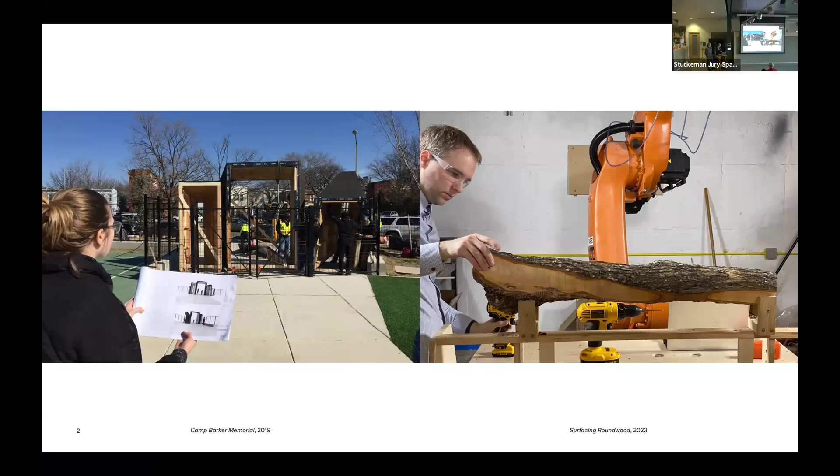Our work is developed through two venues, After Architecture and the Before Building Laboratory. Both venues foreground material investigations from conventional construction to maturing digital tools. After Architecture is our architecture practice, named to convey the built environment's impact on cultures and ecologies. We implement ideas and systems developed in the lab on real-world projects, including temporary installations as well as permanent buildings and public art. Our work is characterized by a foregrounding of material and its accompanying narratives.

We started our practice through designing and building permanent works of public art, which often doubled as furniture and lighting. Early on, we also pursued design build competitions. As our work developed, we found that our firsthand experiences with construction stirred up questions around material processing, impact, and efficiency.

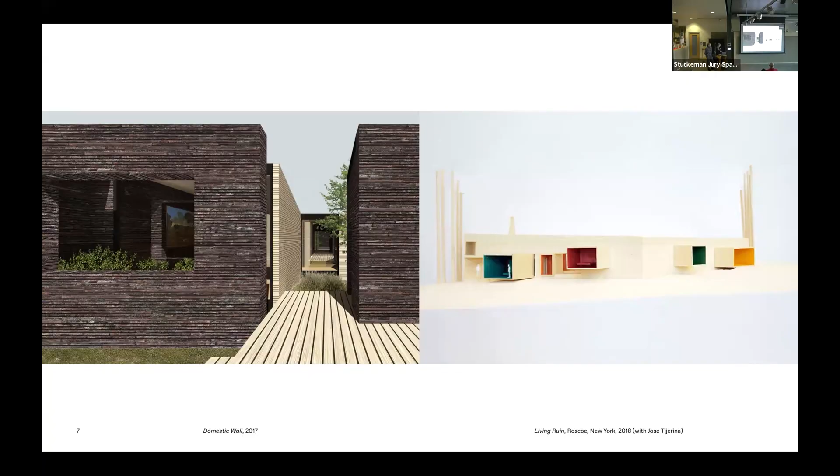Such questions are explored through design across scales, from an outdoor classroom to a theatrical landscape. These questions also inform the design of housing that leverages thermal mass and existing ruins.

More recent work seeks to collaborate with natural materials and processes, including the cultivation of barley seeds in shaped molds that produce both models and furniture. Here, the overall form is controlled by the designer, while aesthetic effects of the surface, texture, and density are co-authored with other living organisms that have their own specific behaviors and growth patterns relative to light and gravity.

As a complement to our professional practice, we co-direct an academic research laboratory at the University of Virginia. The Before Building Laboratory pioneers new material assemblies to advance circular construction practices, allowing for experimentation and the taking of risks through grant-funded projects that are often not possible in purely client-driven work.

As the climate crisis leads to indeterminate material supply chains, architects and builders must look beyond existing industrial materials for construction. There are numerous materials to be found locally that, if strategically sourced, have the possibility to improve native ecosystems.

For this goal, we collaborate with a team of student research assistants to investigate the use of native grasses, invasive plant species, and trees targeted by invasive insects. In each case, we work to understand and leverage the unique properties of these atypical natural materials.

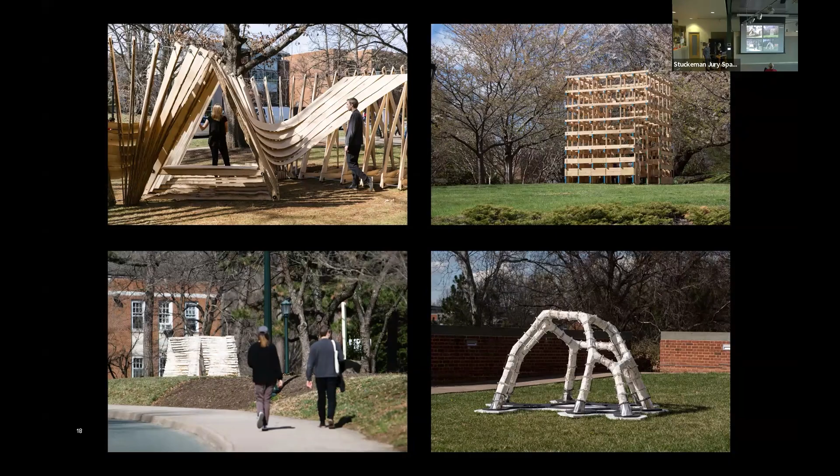So to transition and talk about logs and lumber now, our recent work focuses specifically on wood, where the work is questioning the planar assumptions of mass-produced lumber by interrogating the practices of sawmilling. How do we turn logs into lumber?

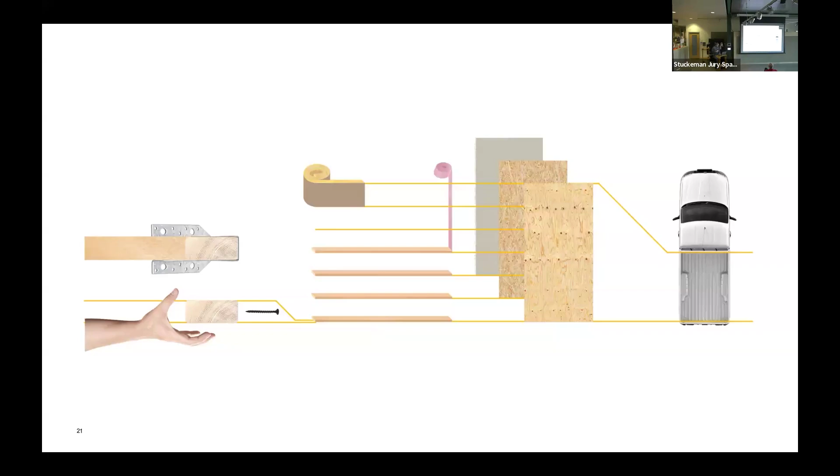Even as new movements in architecture have embraced bespoke form, prisms and sheets remain the basic unit from which geometry emerges. The tectonics of the digital turn extend and reapply effective methods to now create custom form from standardized materials.

So in projects like these, we have logs that are turned into standardized sheets, such as plywood, and subsequently then turned into bespoke customized forms through digital fabrication processes. And in each step in that process, there's energy and time and often wasted material.

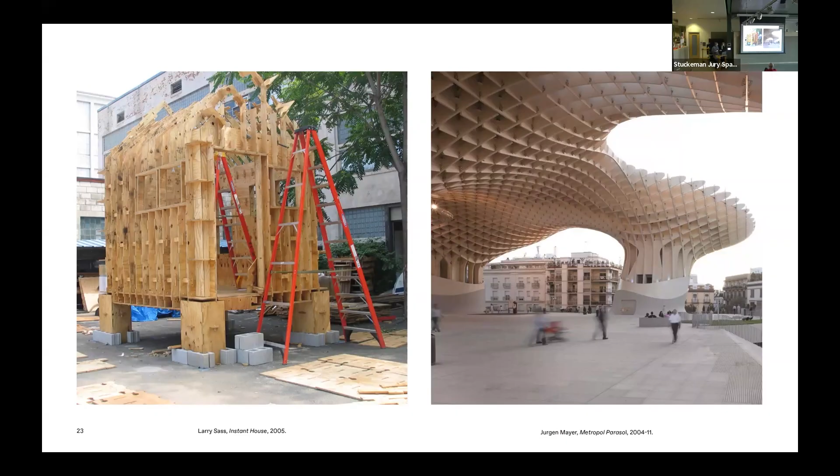So most recently, the timber turn in architecture has resulted in a series of products that thicken and multiply the familiar lumber unit and plywood sheet into meatier assemblies that promise larger buildings and more sequestered carbon.

So this is an argument made for more material rather than less, right? The more wood you can put into a structure, the more carbon you can sequester within that structure.

But these are similarly bound by the formal restrictions of dimensional lumber, and they largely are a kind of ecosystem of building products that produce straight beams and columns and flat floors and walls.

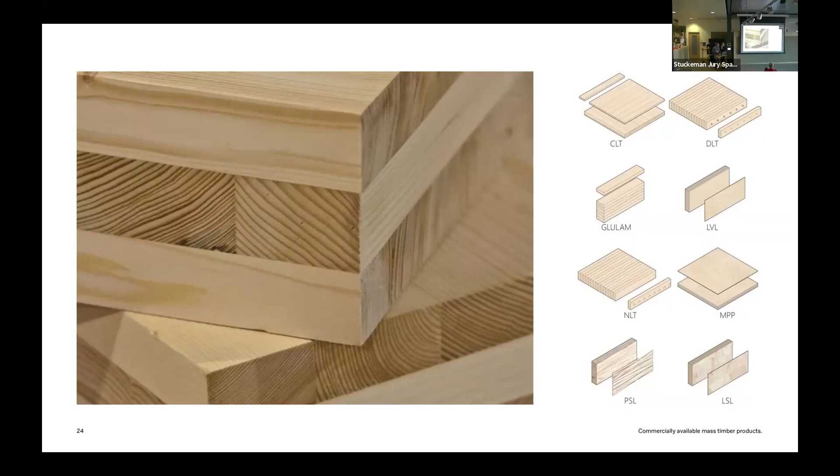To get into some projects now: Tangential Timber, which you might notice from the posters in your beautiful school here. This project pilots an application for cross sections of wood. These are called either rounds or cookies in the timber industry—we wish we thought of this name, we did not, but we love that they're called cookies. For the project, we sourced wood from a campus stockpile of trees felled by storm, disease, and infestation. This material was either too short, too curved, or otherwise irregular to be turned into conventional lumber, so we were looking for other applications for it.

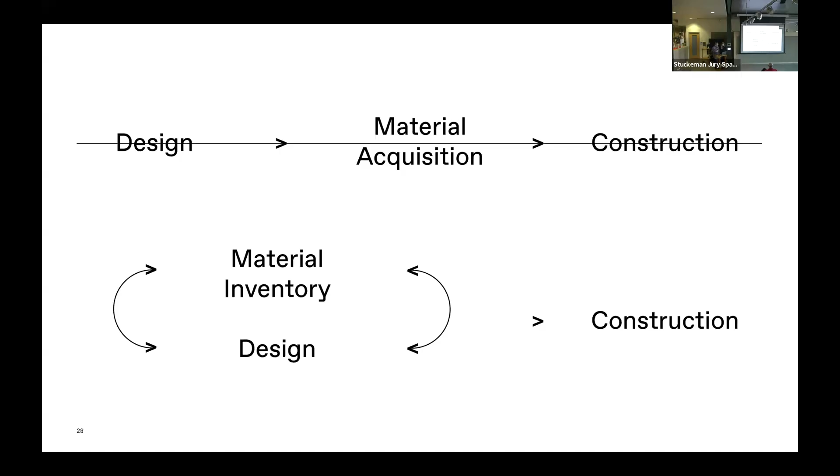If traditional project delivery involves creating design documents long before material is ever acquired, twinning instead offers the potential to leverage 3D imaging technologies to inventory material inputs, allowing the design process to progress as a dialogue with materials. There's a feedback loop formed between the specific material you're using and how the design itself takes shape.

Twinning presents one strategy for incorporating material feedback, referring to the creation of digital doppelgangers of physical artifacts through 2D and 3D imaging technologies. The technology itself is not new—it's been around for quite a while—but it's becoming increasingly accessible and available to more people.

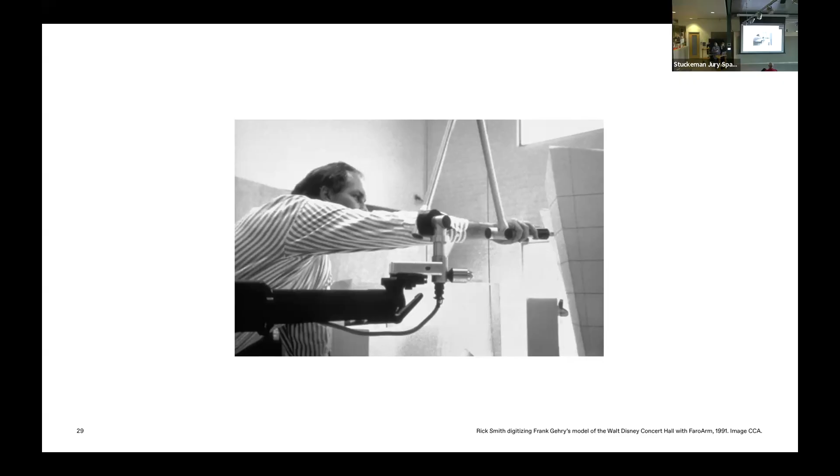Shown here is an example of early digitization practices in Frank Gehry's office. Here they're deploying a 3D pantograph in which points are located in three-dimensional space on a physical object, in this case a large-scale architectural model. Those points are then translated into the construction of a 3D digital image.

Standard 3D scanning methods of each cookie would have produced really detailed digital models that would promptly crash our computer if we were working with all of these in the same file in Rhino and Grasshopper. So instead, we developed a custom low-cost, low-data workflow to document each piece of material.

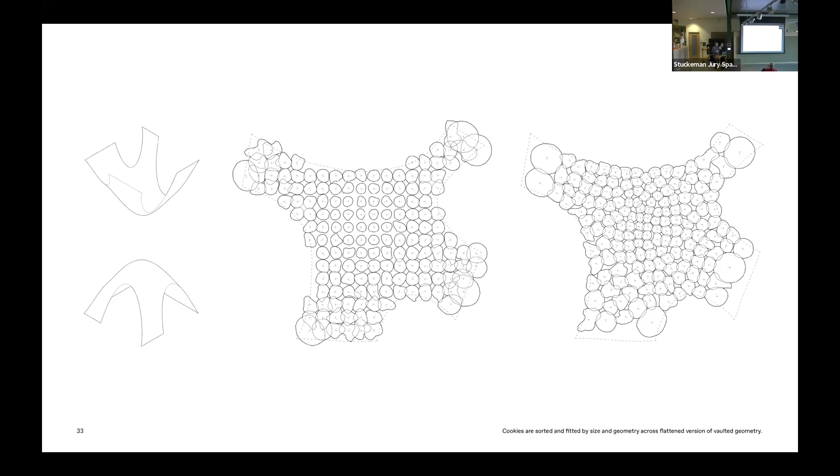We did a spring simulation to gather the cookies, and on the right you see them in their aggregated form with overlaps, the controlled distance of which is important for generating joinery between the pieces. The vault is square in plan with arched openings on each side.

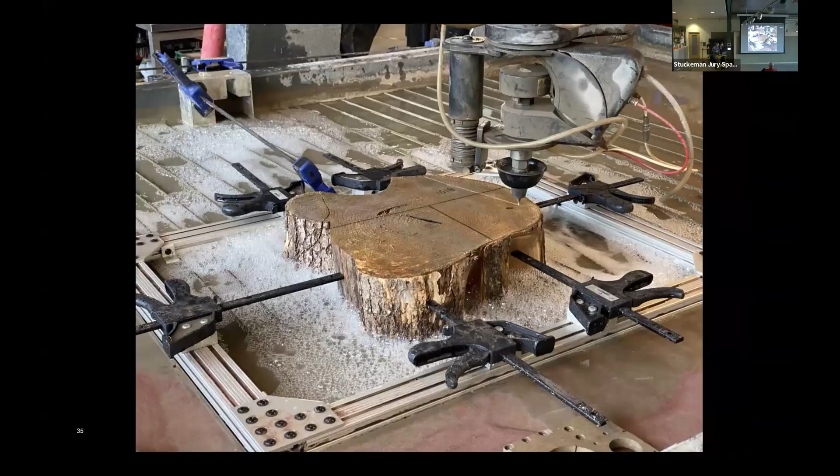To fabricate the structure, the first step was done with a 5-axis CNC water jet, used to cut the complex joinery in each cookie with a series of ruled surfaces. We had to cut all the way through the material.

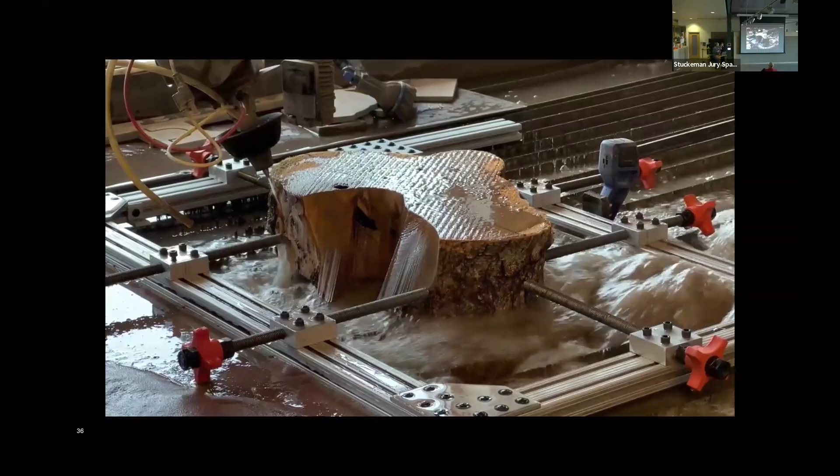There are limitations in all these tools. We view them as opportunities. In this case, we have to cut all the way through the material in a straight line, hence the ruled surfaces. This joinery was tailored to, and actually generated in part by, the profiles of each cookie itself.

Finally, timber units double as both structure and ornament. Structural stress lines are inscribed into the surface of the vault and produce a CNC milled texture.

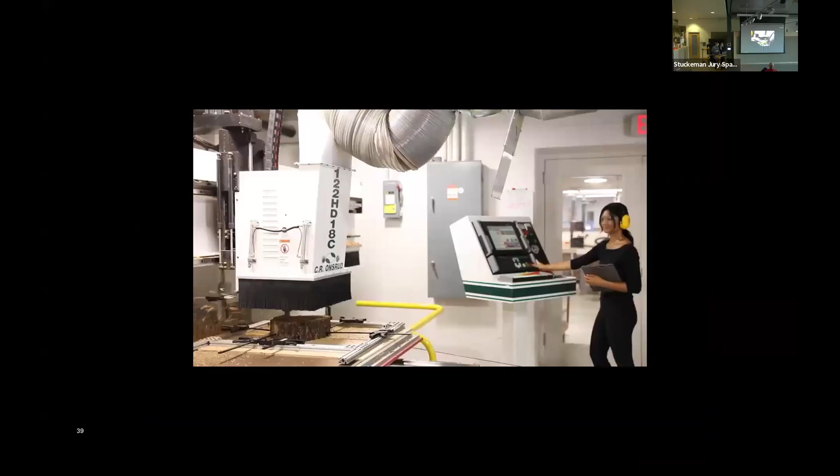This is a more traditional digital fabrication process, but with custom toolpaths generated from our scripts. These lines double as a graphic pattern for aligning the wood masonry units in this 3D puzzle, and also register as a second wood grain overlaid across the tree's growth rings.

We also use this as an opportunity to control the thickness of the shell. The depth of the cut was determined by the density of these stress lines from a structural simulation, and the shell was thicker where more forces were present and thinner where less material was needed.

Once fabricated, the pieces are relatively easily assembled by one or two people with minimal scaffolding, and the structure quickly becomes self-supporting.

Those lines are really helpful to actually assemble this thing. You have this 3D puzzle you're trying to figure out, and those lines, those graphics on the surface, became a kind of visual aid in that process.

The interior of the structure takes on an entirely different texture than the exterior. The vaulted design is a small-scale investigation that suggests how customization technologies can enable designers and builders to work more closely with and responsively to irregular natural materials across scales.

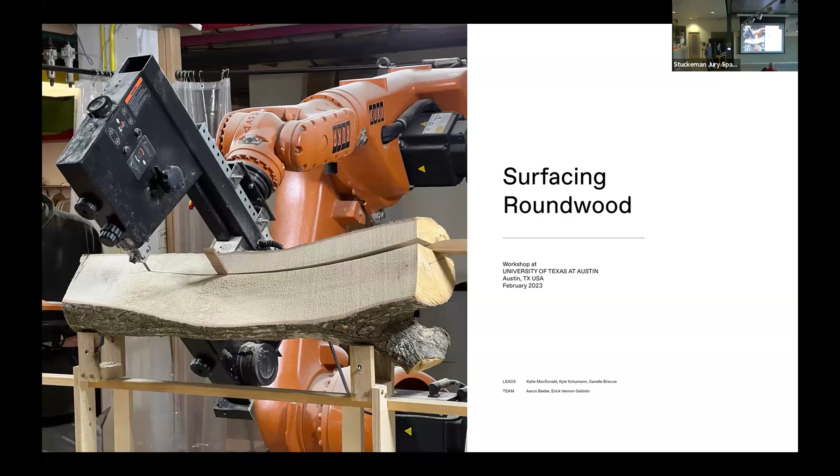In the next series of projects, we're looking at, again, how to respond to the specific geometry of material. Surfacing Roundwood was a workshop we led at the University of Texas at Austin, which explores possibilities for roundwood timber through low data 3D scanning methods and the robotic sawing of roundwood logs.

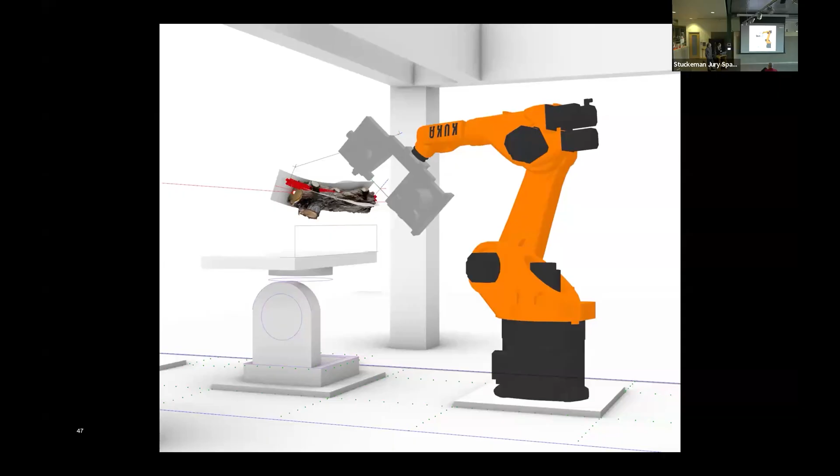The workshop builds on other researchers' work mounting custom bandsaws to robotic arms as end effectors. Rather than build a bandsaw from scratch, we mounted a small off-the-shelf woodworking bandsaw on a robotic arm, then using the 3D scans, generated tool paths relative to the curvature of each log specimen.

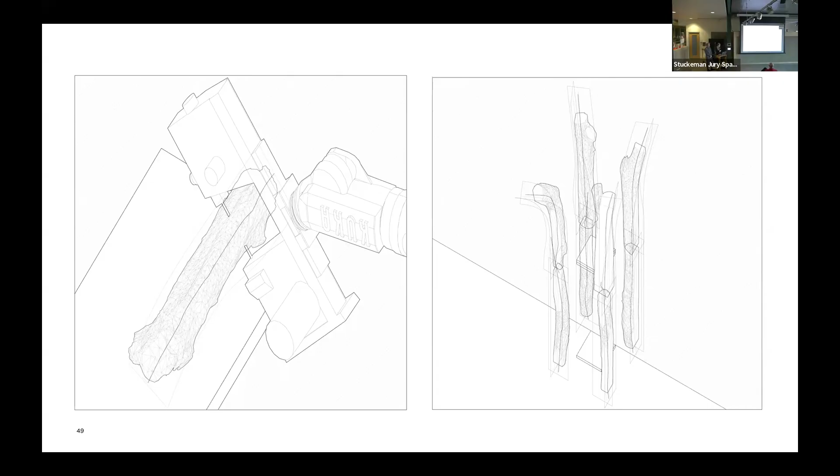These cut logs were assembled into a columnar assembly with a straight conventional base and a capital that embraced the deformation of each log's center line.

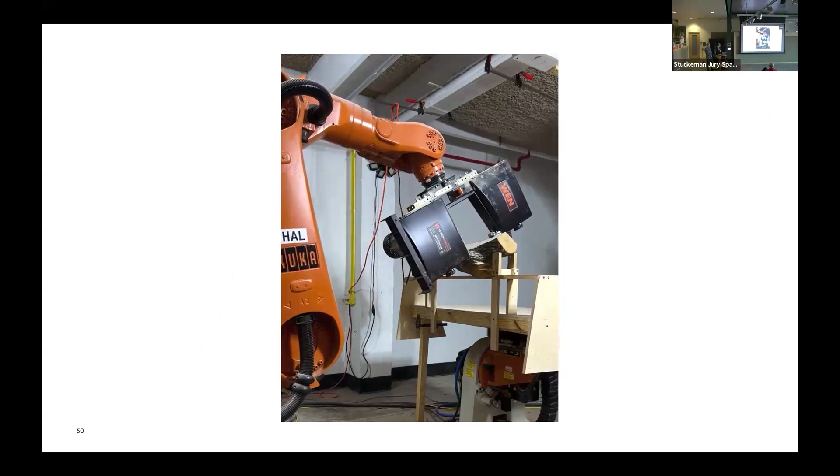Our work with water jet methods on tangential timber and robotic arm methods on surfacing roundwood brought to the surface the drawbacks of each. Both energy-intensive machining methods require an expensive, fixed-in-place tool, as well as specialist software knowledge. So in response, we endeavored to build a deployable, lower cost, and more accessible counterpart to these tools.

Our custom computer numerically controlled sawmill advances the traditional analog gas-powered sawmill with sensors, motors, and guides choreographed by G-code. In a traditional bandsaw sawmill, blade height is controlled by a manual winch and horizontal movement is accomplished by an operator physically pushing the bandsaw along the material.

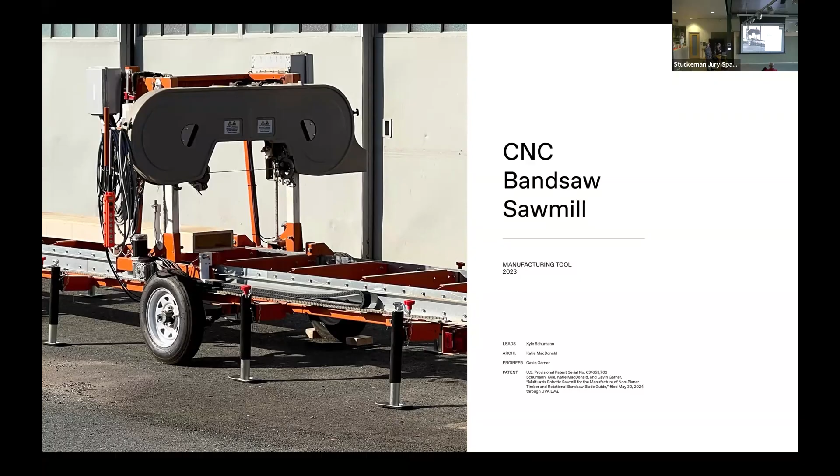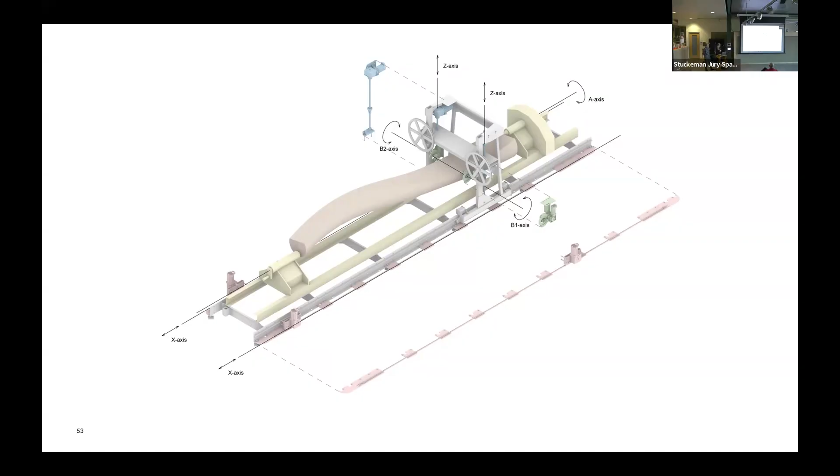In the new machine, all movements are achieved by electric motors and CNC control. Horizontal movement is accomplished by chain drive, while vertical movement is accomplished by ball screw drive. New blade guides enable angling and twisting of the bandsaw blade while cutting, and the machine is fully electric, and can be powered by a small portable generator if taking it off-site where electricity is not available.

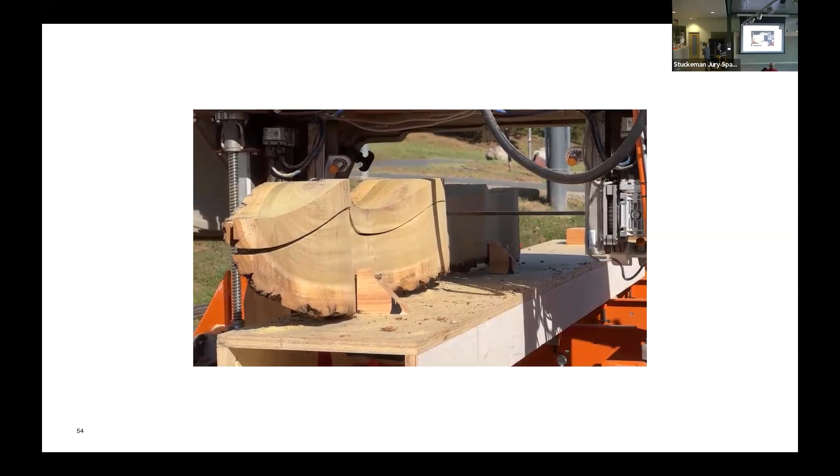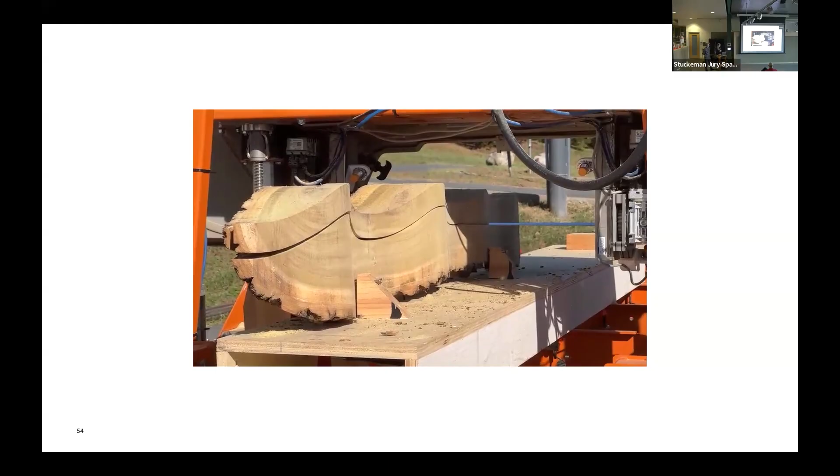Like the maturing of CAD software during the early digital turn, we believe the accessibility of our techniques will influence adoption. Anecdotally, we have found that builders, facilities personnel, and the public are more eager to engage with the familiar tool of the sawmill than the robotic arm, which enables a wider variety of operations but is thought to be relegated to industrial factories. This precipitates a hypothesis that such a tool may allow for wider engagement.

Once we had this tool online, the first project we constructed was Sylvan Scrapple, an installation for Exhibit Columbus, a biennial exhibition in Columbus, Indiana, curated by the Landmark Columbus Foundation. Exhibit Columbus is unique among biennials in its commitment to facilitating sustained engagement between the designer and the city over the year of project design, with multiple public presentations and stakeholder sessions.

The biennial is situated around a compact, walkable downtown. Columbus has an amazing and unique architectural legacy with a collection of over 80 significant works of architecture. But despite this rich history, Columbus faces challenges activating its downtown, particularly post-pandemic—adapting the grand scale of its mid-century urban space design to fit its population of 50,000, and building sustainably, issues that many cities face.

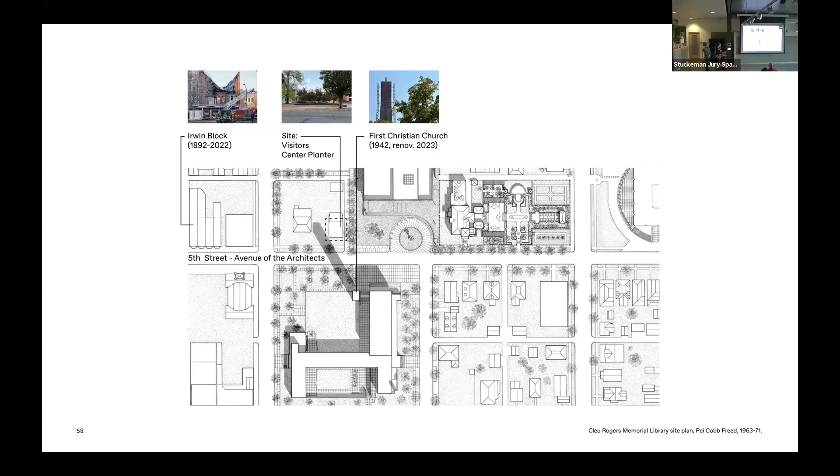Our project is sited along the Avenue of the Architects, between I.M. Pei's Cleo Rogers Memorial Library and the Kevin Roche Columbus Visitor Center, and down the block, the historic Queen Anne style Irwin Block, in late 2022.

Sylvan Scrapple responds to these specific site conditions with transferable tactics: urban activation, mass timber construction, and material reuse. A 110-foot long snaking wood wall was inserted into a 2,000 square foot landscape plan, framing a series of elevated seating areas and overlooks.

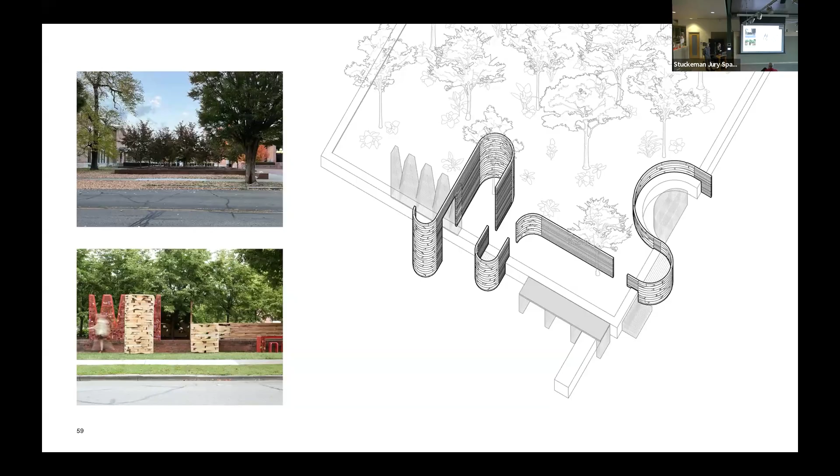The project combines two material streams, landscaping waste and demolition material, to form a wood wall and gabion furniture. Curved logs were cut into 3-inch wide curving boards and stacked into walls.

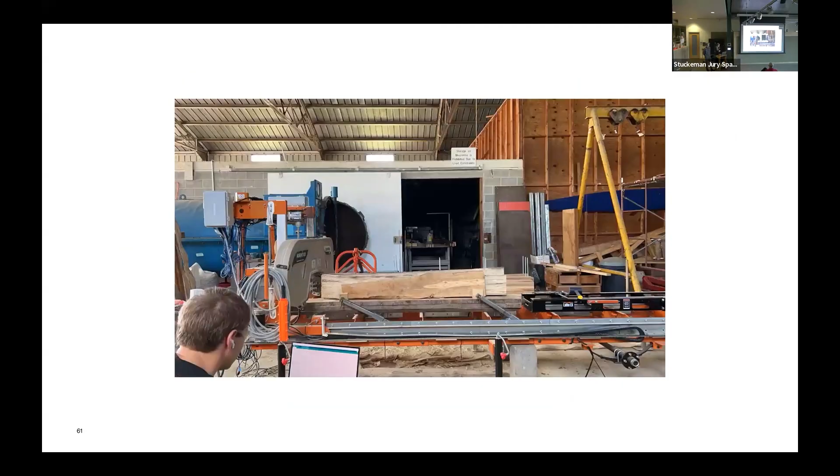The project leverages curvature in plan to create thin structural walls with a series of arc sizes that allow for the nesting of geometries during the sawmilling process.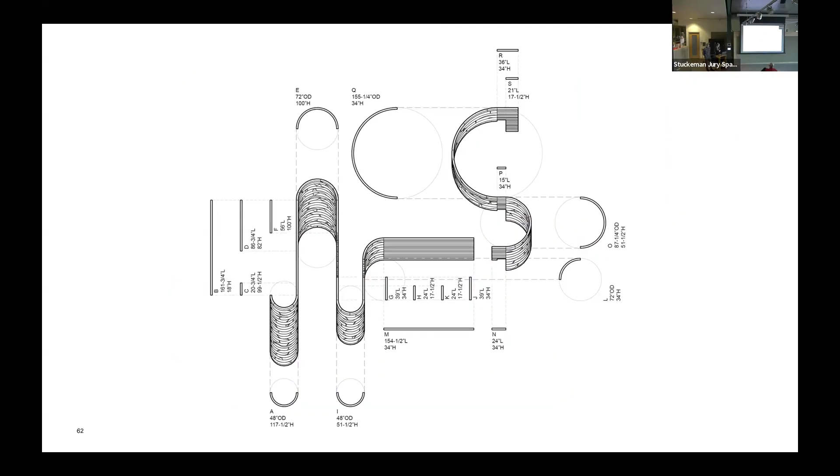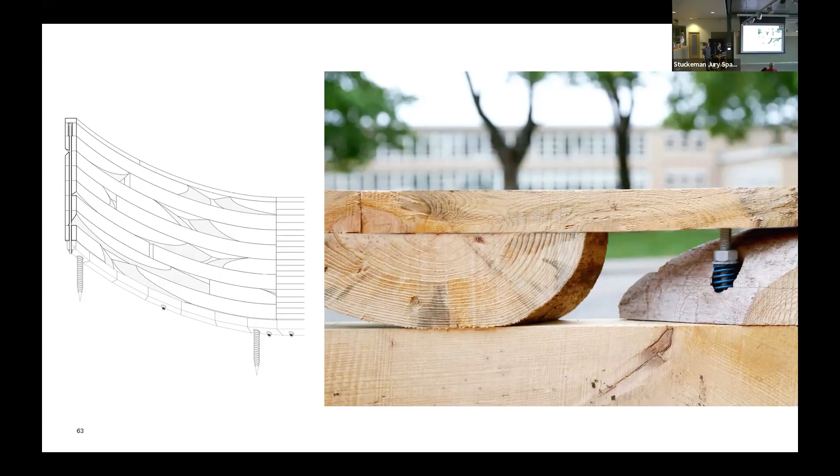The curved mass timber walls are designed to avoid toxic adhesives and allow for easy assembly and disassembly by hand. Stacked boards are post-tensioned with threaded rods, eliminating the need for glue and allowing for disassembly. Integrated springs permit fluctuations in moisture content in the untreated wood, which over the course of the year can produce height changes of up to 2 inches.

The resulting walls are very solid but extremely thin, with porosity created by the bark surfaces of the milled logs.

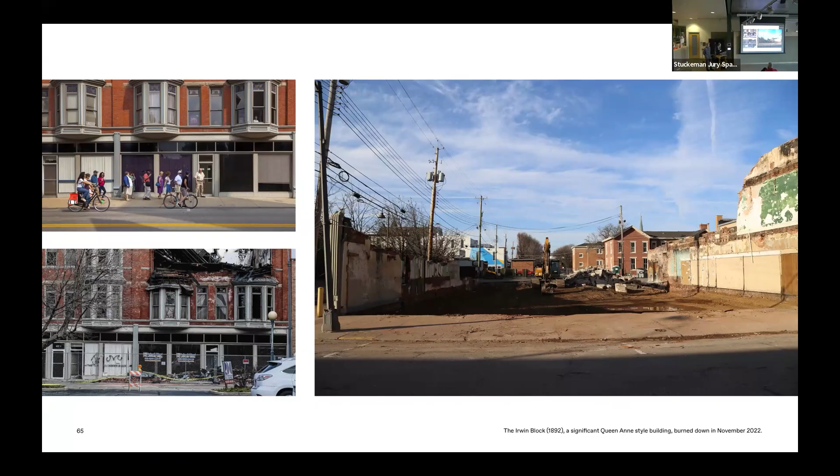A second material system collects bricks salvaged from the Irwin block, which had burned down, and a building across the street being renovated, the First Christian Church by Eliel Saarinen. It takes the bricks from these two buildings, which were not going to be used again, and collects them in a series of custom gabion cages that augment the existing brick planter wall.

The gabion cages are complemented by a dining table formed with bio-based resin, which collects construction scraps and anchors the installation with a story about material sourcing and reuse.

After the exhibit's short lifespan as part of the biennial, these pieces become permanent furniture that can be used elsewhere offsite. With that table, the public was invited into a game of I Spy, where they could locate panels from Saarinen's tower across the street, fallen branches from the nearby park, and bricks from the burned building. The snaking wall invited visitors up into the planter, framed thresholds, and provided a serene nook.

Some of our opportunities to interface with the public provided key takeaways for us as designers, which was that material reuse became especially resonant when residents can point to the nearby site from which the material was sourced.

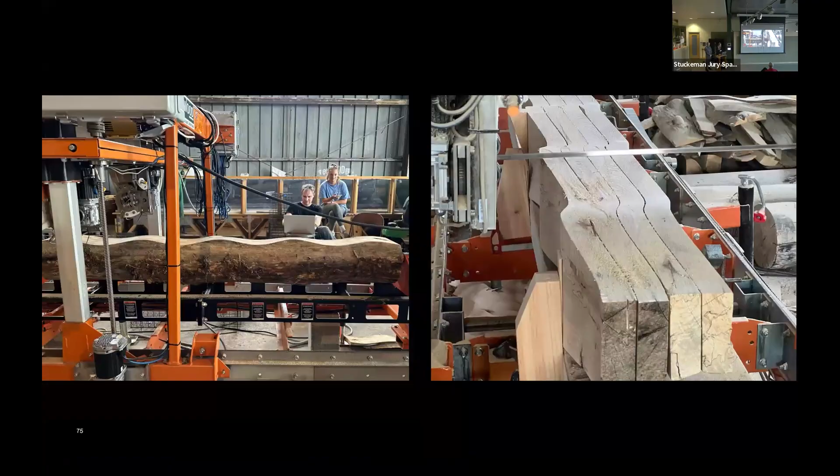The tool is used to cut wavy or sinusoidal boards, which are serial nested non-planar lumber units that can aggregate into lightweight porous wood panels.

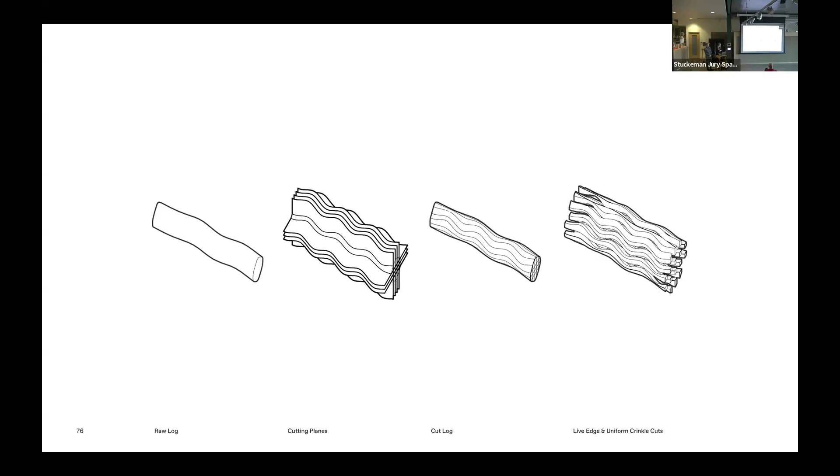This workflow produces two types of crinkle cut elements: uniform boards, which are rough cut on all 4 sides and are 2 inches by 2 inches in cross section, and live edge boards, which are rough cut on 3 sides, leaving one live edge 2 inches thick with a variable width along the natural geometry of the log. Here you see the regular unit, cut on 4 sides, and the irregular unit, which has one raw side.

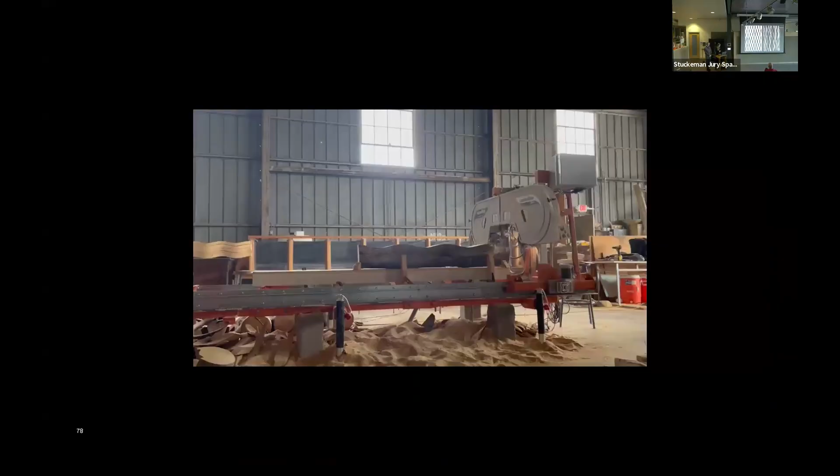To mill this material, a series of wiggling tool paths are cut on the sawmill, producing undulating live edge slabs. These slabs are then rotated 90 degrees and cut again.

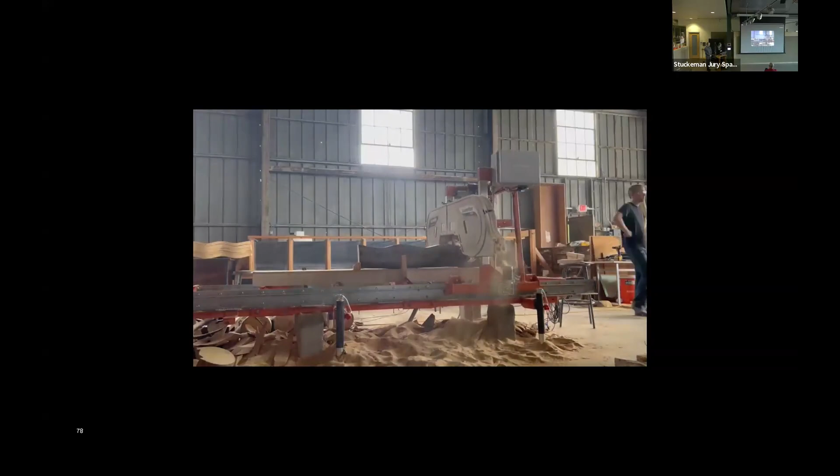The resulting wavy or crinkle cut boards join with fasteners into lightweight porous structural wood panels and are deployed at an inhabitable scale through a demonstration assembly, which was rapidly assembled by hand. The pavilion was assembled in a single day as part of a workshop at New Jersey Institute of Technology.

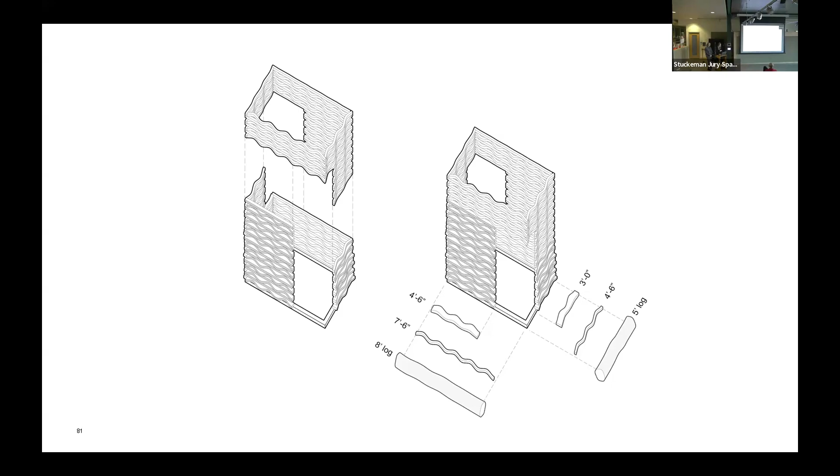Orthogonal door and window openings are located on opposite corners of the installation, placed so that there are only 3 lengths of panels. This optimized our input log lengths.

Finally, the pavilion uses beetle kill ash logs gathered from the forest floor. Beetle kill ash is identified by the curving path of the invasive emerald ash borer, which tattoos these markings into the cambium layer, or living tissue located below the bark. The beetle kill path markings remain visible on the live edge units, pairing strikingly with the wiggly geometries of each crinkle cut. In this way, the live edge crinkle cuts bridge industrial seriality with material expression. The markings of a pest transform into an efficient structural geometry, serially manufactured for lightweight panelized timber construction.

Building on these projects and this technology that we developed, we're now working with students to explore the formal potentials that result from cutting non-planar lumber. This is an example from a workshop we taught together at Syracuse University last fall, in which students worked through 2 projects. The first was the design and fabrication of a small expanded timber volume that just so happened to function as a stool, and a much larger series of surfaces that they built collectively to form a much larger collective table. The first project asked students to work with the geometry possible with this technology to expand 4x4 lumber into an expanded forest volume using a series of cuts analogous to what's possible in the sawmill.

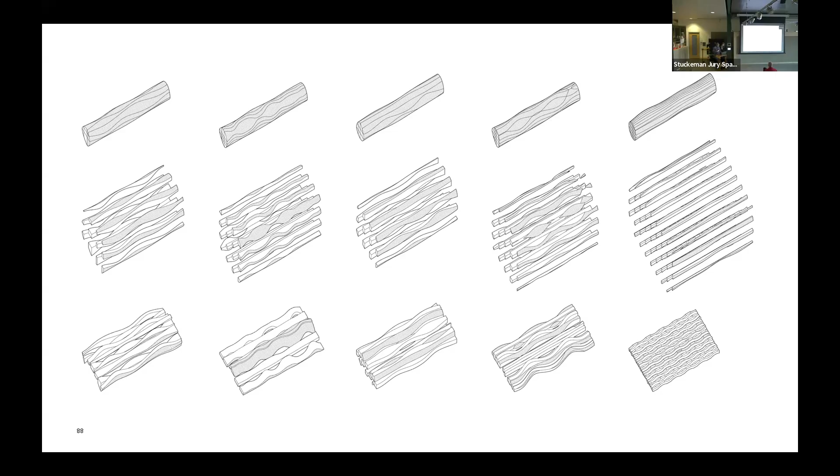Each group received a single log worth of material, about 5.5 feet long. They didn't see this material ahead of time. They knew the approximate size of it, but there was a kind of unknowability in the material that would be produced, and they had to reconcile with that through the assembly of these pieces.

The first thing we asked students to do upon receiving their milled material in person was to reassemble the milled elements of the log that got mixed up through fabrication and transportation. This turned out to be a surprisingly productive exercise. You had to read the complexities of bark, grain, and geometry to figure out how these pieces were nested together. Once those pieces were nested, students were able to deconstruct the log and rearrange it into the predetermined aggregations they had developed digitally.

In some cases, that went exactly as planned, and they were very pleased. In other cases, there were either challenges with the actual irregularity of the material in aggregating their designed forms, or they found other opportunities in the material and wanted to accentuate or celebrate different qualities of the grain, bark, and geometry that was produced. So there are a variety of strategies that came out through that actual physical process. When we do things digitally and physically, there's always unknowns and realities that we have to deal with in physical material. This was a really nice way of working through those issues.

So much of our work advancing bio-based materials in construction takes form as material prototypes and pavilions. These small-scale investigations and temporary installations can sometimes feel free from the constraints of permanent construction and habitation. They're kind of like parlor tricks.

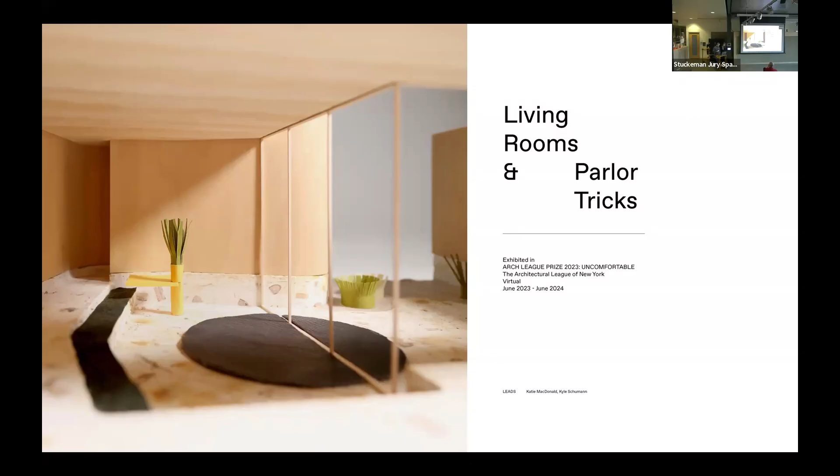So for a recent exhibition, we developed a series of living rooms and parlor tricks, a series of models in which we try to translate some of these material strategies and construction methods and types into domestic tableaus. In these models, for example, curving wood walls draw from sylvan scrapple to frame a sunken courtyard within a living space. A scrapple floor embeds offcuts into the home's plinth and garden. Or cookies from the wood masonry compression shell, tangential timber, and nonlinear wood column surfacing roundwood might merge together in a model into one cohesive system, becoming a living room with a vaulted wood masonry roof.

It's also kind of challenging, and the exercise of actually producing these models at a larger scale was kind of a lesson in and of itself. We were really interested in how the combination of the horizontal and vertical surfaces produced these seamless transitions and unexpected geometries, as the raw form of the logs or sticks at model scale is cut into the designed architectural space.

So through full-scale and habitable prototypes and speculative models, we're interested in the new spatial and experiential opportunities of these material strategies. In this project, Sheets and Slabs, we present a set of twin vessels. They're identical in form, but differing in material construction. They're designed as testing chambers for neurological research on the effects of architectural materials on human stress levels and brain activity. So material composition is the primary focus of the project.

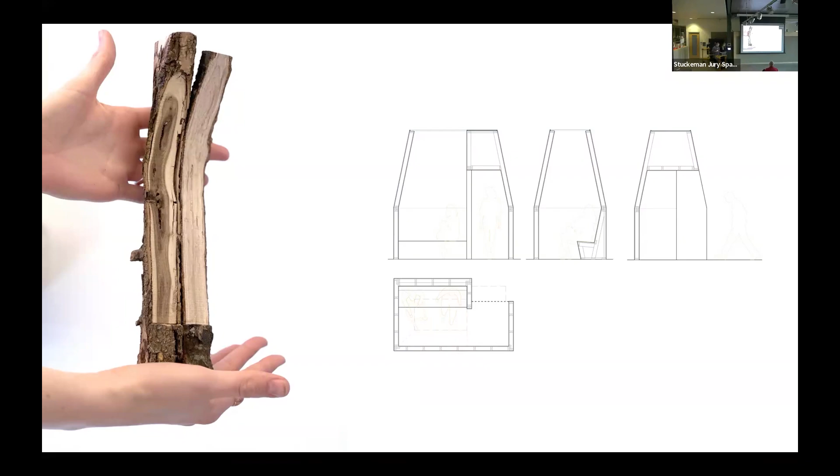The volumes, the design of the spaces themselves, taper from rectilinear bases into funneled skylights. Material is subtracted from each volume to form an entry threshold at the corner and compress an entry condition that then releases vertically to make the space feel larger and less claustrophobic, even though it's relatively small in plan.

And the spaces were constructed as panelized assemblies. So it's all made as flat sheet assemblies that were then bolted together on site. You could transport them, fabricate them somewhere, move them to the space where we were doing the testing, bolt them together, and then later on detach those panels and move them to their future location.

The control, Sheets, is clad in drywall on both the interior and exterior, while its doppelganger, Slabs, scribes live edge slabs into meandering fields of grain and curves. After data collection is complete, the chambers will be repurposed as study rooms on campus.

So as we finish up, we'll transition to some of our professional practice work. Located in Northwest Washington, D.C., the Camp Barker Memorial responds to the landscape of American monuments, taking form as a series of spatial markers which convey a complex history. The memorial was designed and commissioned in early 2017 and completed in 2019, a period when the role of Civil War monuments was being reconsidered.

The Camp Barker Memorial answers the brief for the design of 3 entry gateways to an elementary school by framing and revealing the site's history as a Civil War era contraband camp. A typology specific to the Civil War, the contraband camp came into being as a Union establishment where people sought refuge from Southern enslavement. In the aftermath of the war, the site gave birth to a longstanding community just blocks from the heart of the Capitol.

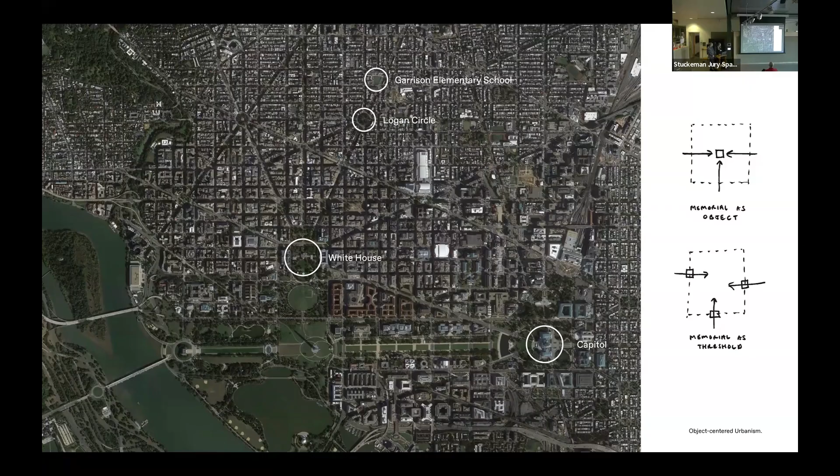The site, which encompasses an entire urban block, is bounded by the linear school building to the north, while fencing on the east, west, and south encloses the school grounds, which double as a public park. The memorial portals address the history of the site and its recreational grounds, intervening in each of the 3 fenced elevations. The goal is to take the monument off its pedestal and put it at eye level, physically and visually accessible to the public, a series of thresholds that visitors must pass through to access the grounds.

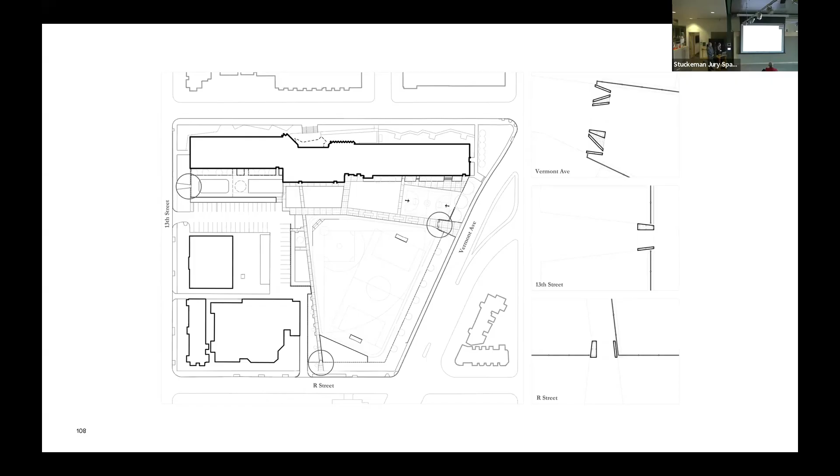In contrast to the marble monuments that define Washington, D.C., the exterior surfaces of each portal are clad in charred wood, a finishing technique which offers fortification against UV, fire, and insects and other environmental agents.

Standing within the portal and looking into the brass liner, one can see the outline of one's own reflection and the surrounding colors, a kind of visible ghost that registers a shared human condition.

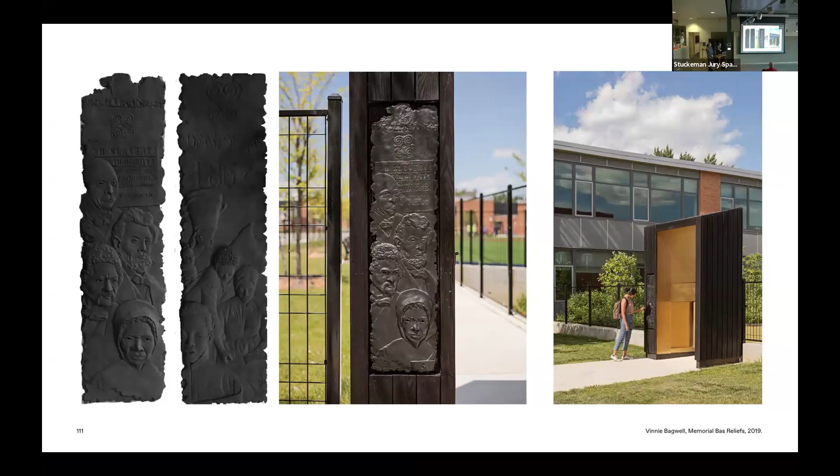Integrated into this palette are a series of narrative bas-relief sculptures by artist Vinnie Bagwell, which convey the site's themes. The recessed sculptures, cast in black bronze to match the wood, are set into the thickness of the folding portals. A continuous folded plane forms the floor, walls, and roof.

On the playground side, smaller side wings create habitable spaces that engage the scale of the school child. The Camp Barker Memorial germinates the site's contradictions for emotional impact. The memorial beacons the elementary school, abstract space frames narrative sculpture, and finally, charred wood folds over a thin brass liner.

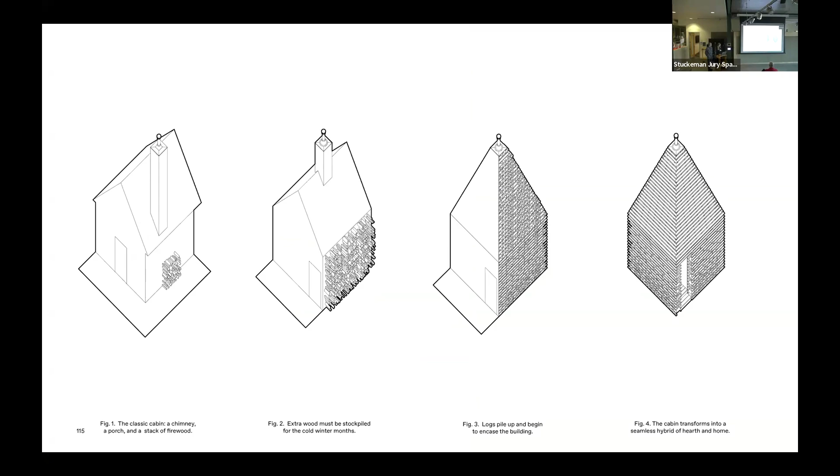We'll end by suggesting applications for the woodwork through Hearth Cabin, an ongoing design build project sited in Vermont's scenic Champlain Valley. The project distills the components of the classic backwoods cabin down to a wood stove and stack of logs, hybridizing these elements into a seamless occupiable space, a domestic chimney.

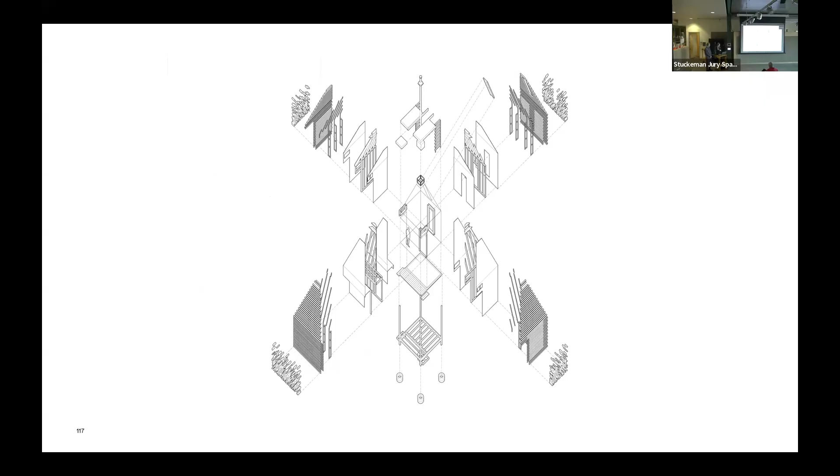Contrasting the vertical timbers of the surrounding woodlands, the building takes form as a horizontal layering of lumber, from its slatted facade to the logs it stows. An open joint rain screen sheathes the building, enveloping walls, roof, and chimney. Stocked with firewood that doubles as fuel and ornament, the cabin is equipped for cold nights.

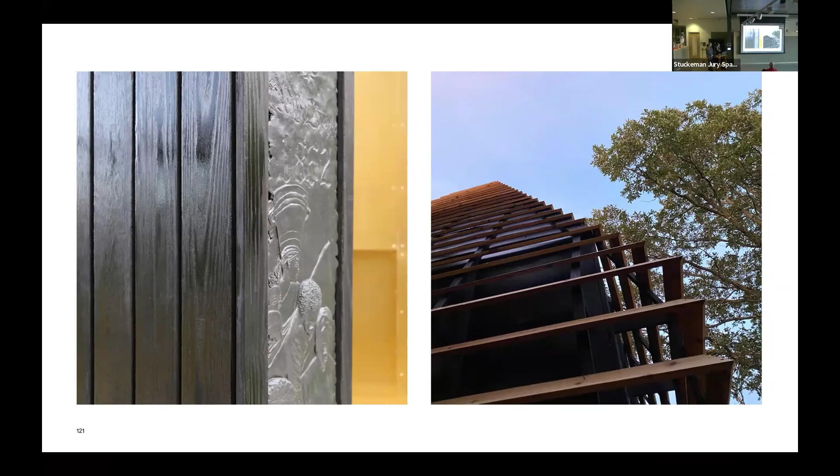In closing, we propose advancing the adoption of sustainable construction by playing off the familiar and pragmatic. We've found that the public warmly welcomes variations on wood construction as a familiar material whose performance can continue to be enhanced, promising scalable solutions. Carbon sequestering, renewable, well codified, and used in building applications globally, timber offers a short runway to broad adoption.

Recent developments in mass timber enable the construction of tall, resilient structures. That said, there is much work to be done. A key focus is to identify the spatial potentials of these new systems, and as well to develop the tools for working with this material.

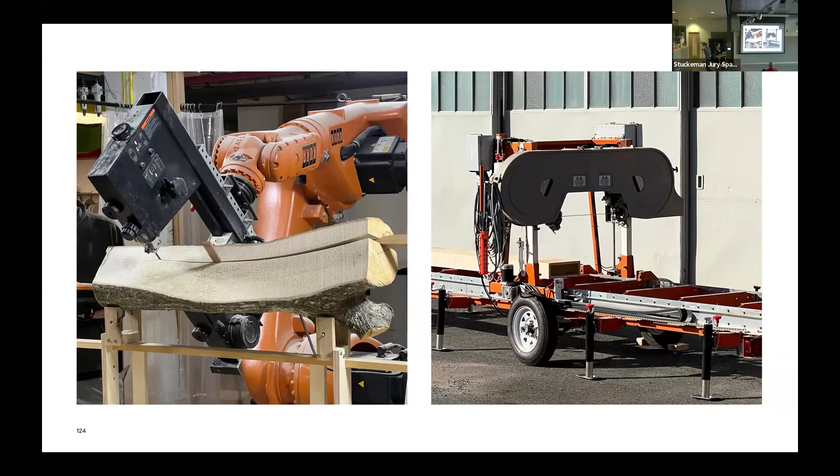So our current work aims to bridge academic research to industry practice. We find that new tools allow us to question the default geometries that have been available to us since the Industrial Revolution, which enables a new spatial paradigm. So we'll end by asking you to join us in welcoming the timber turn in architecture. Thank you.